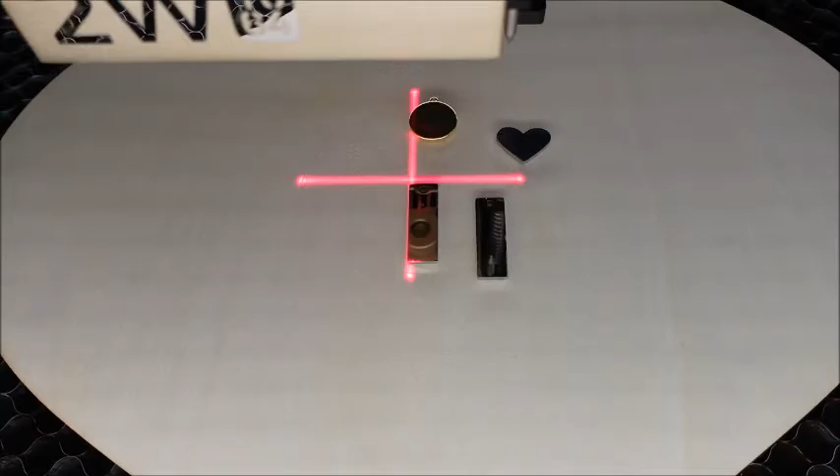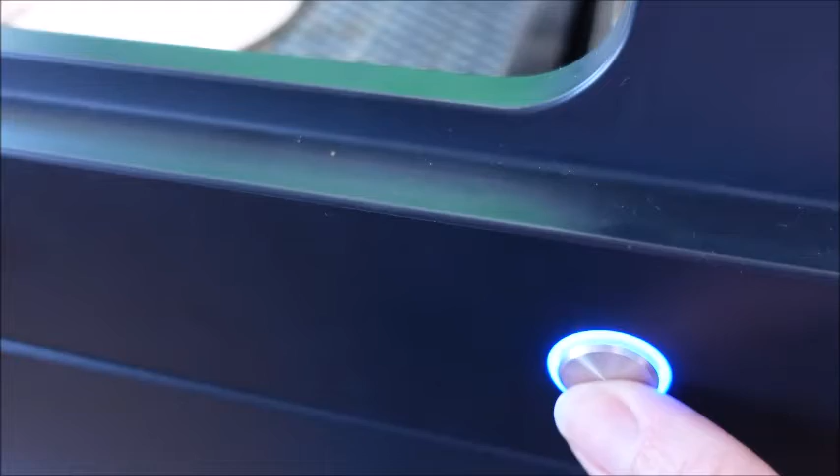I'll show you how to do the rectangle pinpoint positioning. We'll click that and push start marking. Then we'll come over to the machine and move our laser head so that the laser is in the corner of one of our rectangle pieces. Once you've got it in place, go ahead and push the button on the machine. Then you'll see over here on the computer that we've got our first point marked on the computer screen.

Then we'll move our laser to the opposite corner of the rectangle and again press the button. Over here at the computer, you can see that we have a rectangle. Now you'll want to push end marking, and we have our first rectangle. If you only had one piece, you would go ahead and push done, but since we have multiple pieces, we're going to add another rectangle.

We'll move our laser to the next rectangle piece and place it right in the corner, then press that button again. You'll see on the computer screen that we have another positioning point. Back at the machine, we will move the laser to the opposite corner and press the button again. Then you can see we have our other rectangle marked. Now go ahead and press end marking.

Now we're going to do a different mode of marking, so we'll do the circle next. Just click this little down arrow and select circle. You can see right here that you need to mark 3 points, and we're going to mark 3 points on the outer part of the circle. It doesn't really matter where, you just got to mark 3 different points.

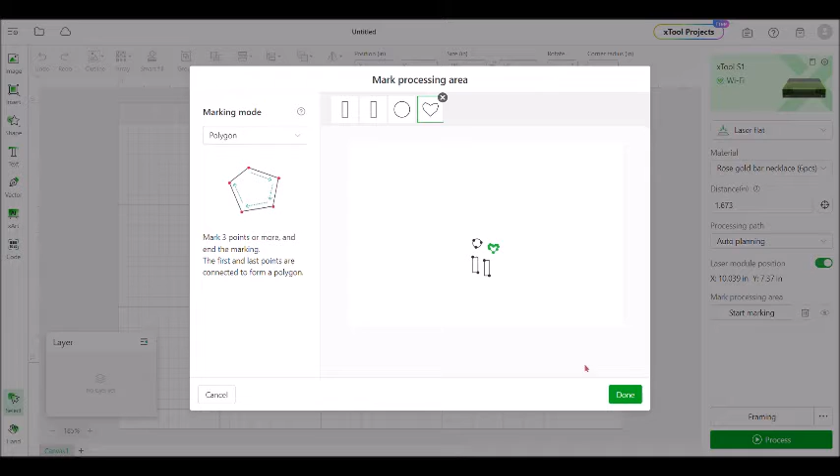You can see at the computer here we have a rough shape of a heart. So we'll go ahead and click End Marking, and then since those are the 4 pieces we're doing, we can go ahead and click Done, and these will bring them onto our workspace.

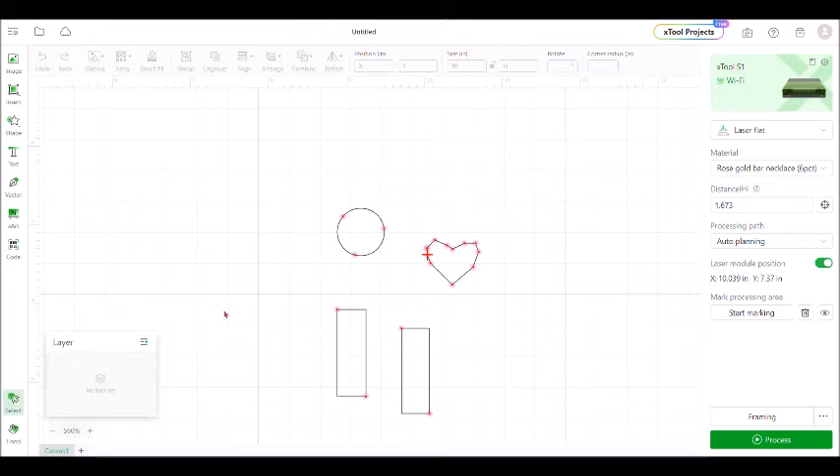Now they're pretty small, so I like to enlarge the pieces so I can see what I'm doing as I'm adding words. Okay, so for this circle, I'm just going to add words to all of them. I'm not doing anything with images on these particular ones, but I'm going to put 'love you forever'.

The other side of this pendant I'll show you is a heart. So I thought this would be cute to give to my daughters, just a reminder of my love for them on the back, and then the front's just a cute little heart. But we'll go ahead and change.

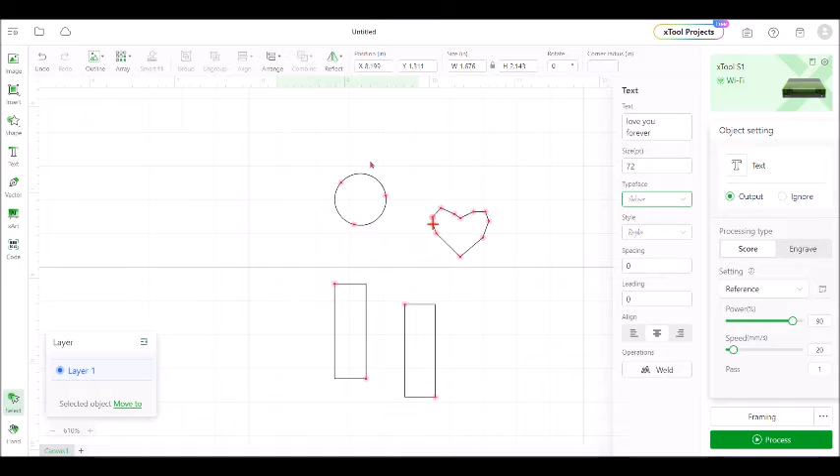One thing: when you enlarge your screen, you don't always see where your words end up, so just scroll around until you see it. I'm going to do -3 here, that will decrease the space between the words, and we'll go ahead and click Engrave.

Power 90, we'll up the speed to 160. The rest of that looks good. And so then now what's left is we just need to shrink it down to fit inside that circle.

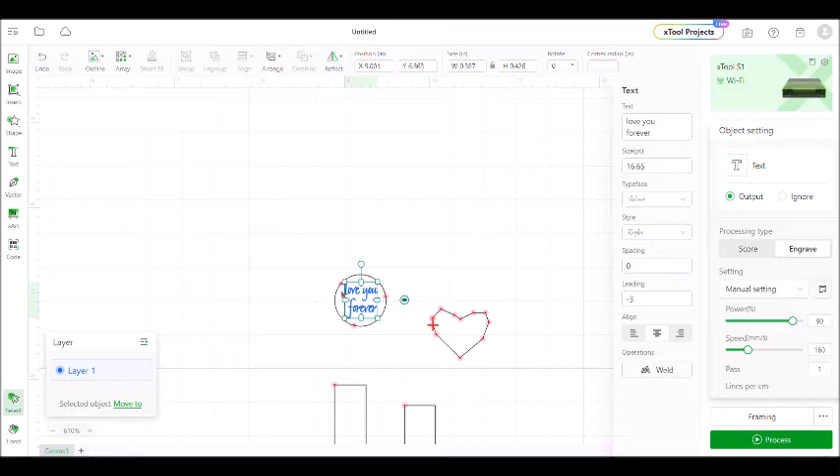So I'm just looking at these points on the side to center it, and so they're all touching the edge, and so it seems centered. And then we'll go ahead for these ones.

I thought I would do my name, my husband's name, and the year we were married on the heart. So we will just add text again, and I'll do these all in caps.

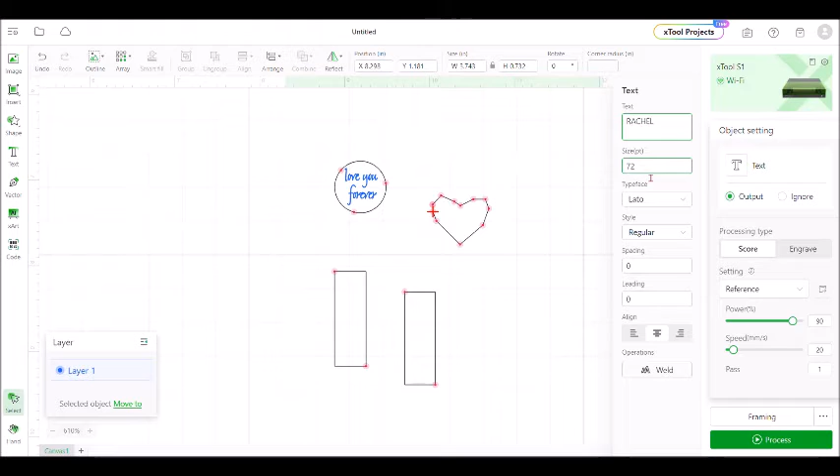Let's see where that went. See, clear up here, so we'll have to bring it down and shrink it way down. I'm gonna push Engrave.

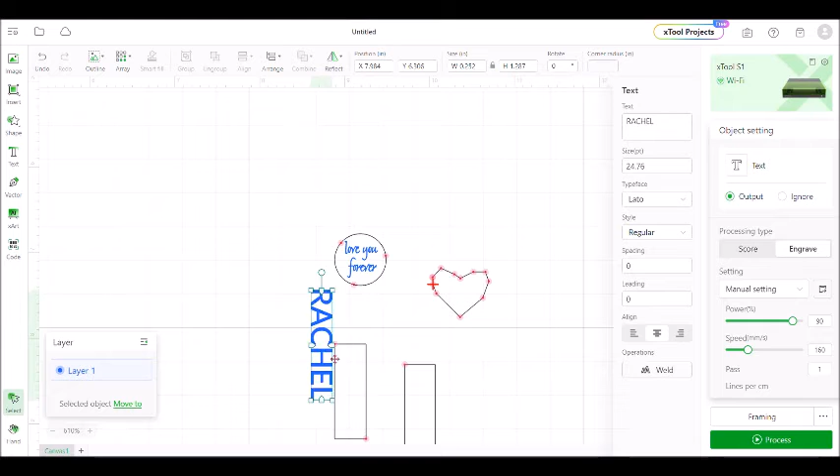And I want this to be vertical, like this. So we'll switch and move that way. And then we still need to shrink it down a little bit.

Let's try 20. Or maybe 17. There's a little bit of room on all the sides. So then we'll just center that.

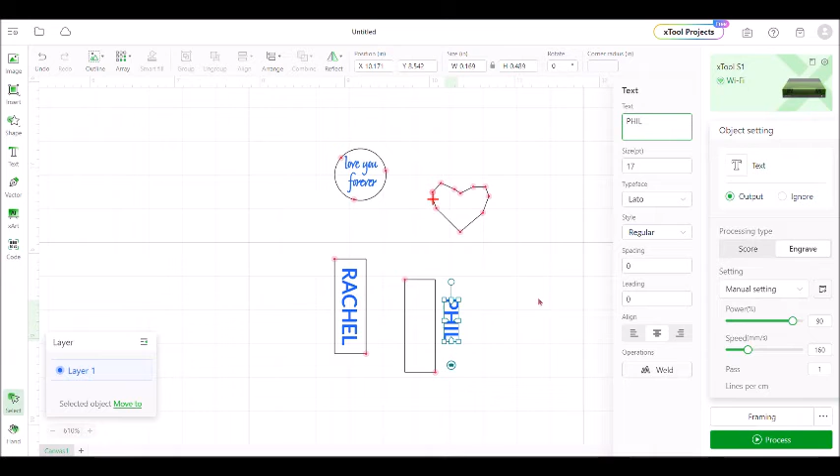And then we can just copy that and paste, and then we have the settings the same as that one. We'll just change the word. So, Phil. And then we'll center that one.

And then we can copy that again and paste, and we'll rotate that back, and we'll do 98. And let's see, an apostrophe there.

So on this one, to center, I'm just going to take it and line it up with that center point right here. And then I can just eyeball up or down where I want it. And I think I want this maybe a little smaller. Let's see. Yeah, like that maybe.

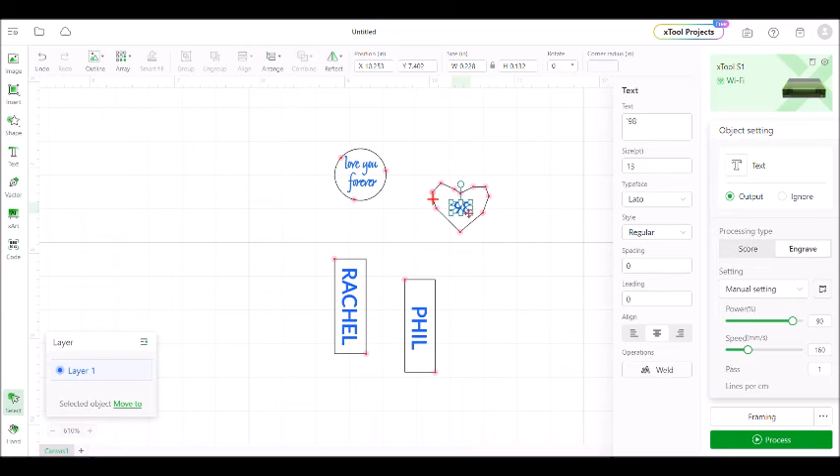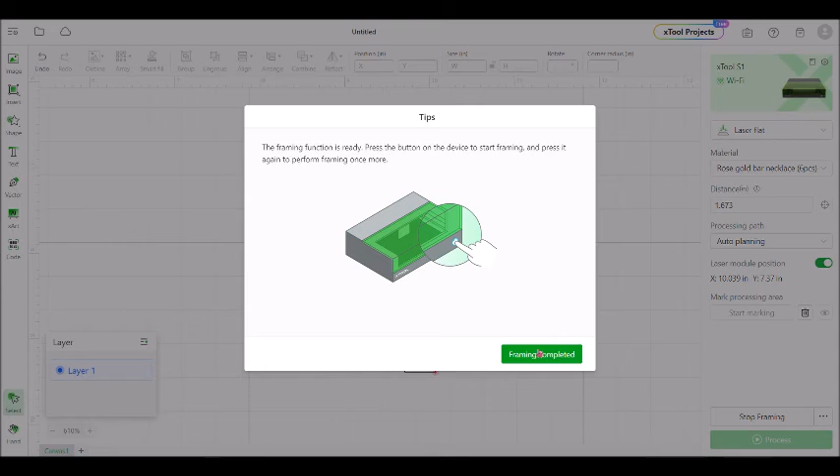Okay, and then we'll go ahead and engrave these onto the materials. So we'll go ahead and click Framing. We'll come over to the machine and we'll push the button. Then it will frame, and you can make sure that it's going to capture in the space that you're wanting. So then click Framing Complete, and then we will go ahead and process.

Make sure and shut the lid. And then we'll go ahead and push start.

Okay, so here's how they turned out. This is pretty faint, I might play with the settings on that one a little bit. I would maybe see where the R is right there, almost in the hole. I would move it down a little bit if I made it again. But that's how you use the pinpoint positioning system.